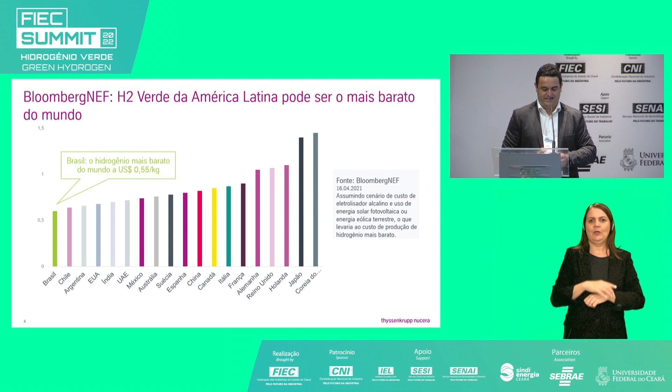It's clearly shown that green energy cannot just be renewable, it has to be new. It's no use to take energy from a plant that has been there for years, withdrawing the energy from the normal grid and leaving it lacking. And here in Ceará especially, we can combine wind and solar energy, which is, once again, a great advantage when we talk about green hydrogen, and an industrial plant ideally needs to be operating as many hours as possible per day in order to provide greater return or yield.

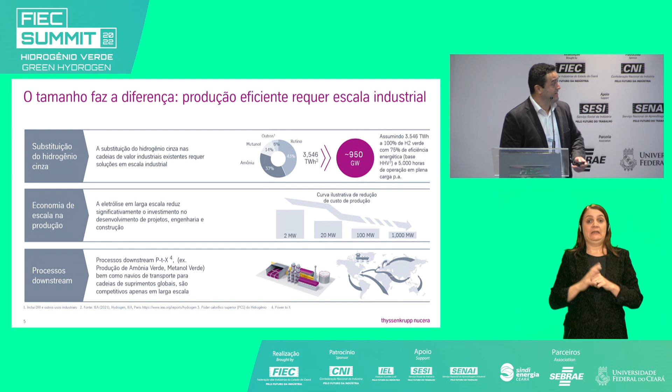What we believe is that the green hydrogen business is a viable business on a large scale. First of all, because the technology chain involved, from the production of solar or wind energy, electrolysis itself, the logistic chain of transport through ammonia and ammonia plants, and ammonia transport using vessels, is viable on large scales. I'm not going to say that there won't be niches. There will. But even based on the Group's history, what we want is to be a leader in large-scale, industrial applications. That's what we believe in.

Now, talking a little bit about our green hydrogen production technology. Green hydrogen is basically the electrolysis of water, using energy to break water molecules to get hydrogen and oxygen. So our greatest inputs are water and energy.

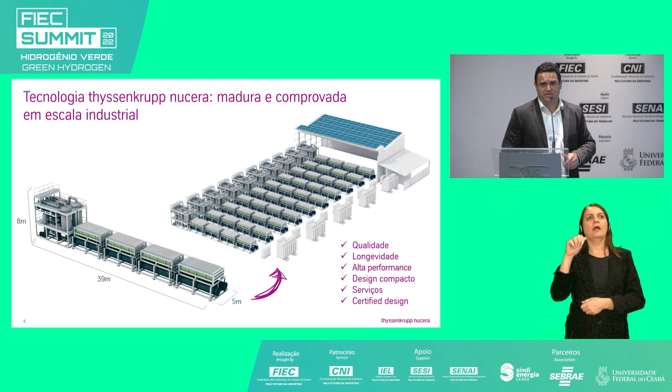In alkaline water electrolysis, basically, you fill the electrolyzer with water and you have an alkaline solution based on diluted potassium salts, helping the electrons to be transmitted within the element. So the electrolysis just happens. We have a capacity of 20 megawatts of electrical energy consumption that will normally produce 4,000 cubic meters of hydrogen per hour, roughly 9 tons of hydrogen per day.

It is a technology that is very mature, because ThyssenKrupp has worked with electrolysis technology since the 1950s. We've been working mainly with chloride alkaline solutions, caustic soda and chlor-alkali, based on electrolysis, and the mechanical design of our water electrolyzer is based on a tested and approved chlor-alkali design, a heritage of the know-how of electrolysis from the 1950s.

It is a non-pressurized, low pressure equipment, so we have equipment with great longevity, typically with electrolyzers we have 30 years, and we need to do a recoating of electrolysis cells to regain energy efficiency. And as Monica said, ThyssenKrupp is in Brazil.

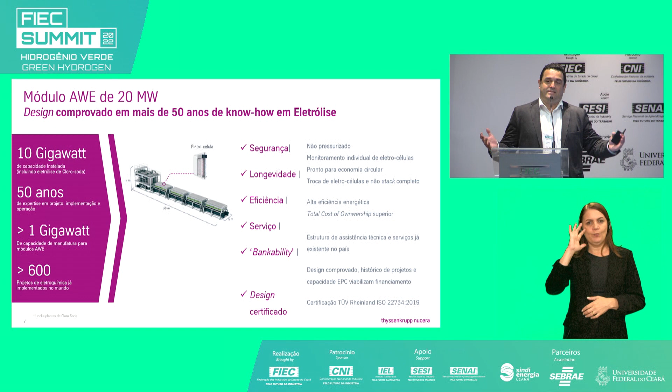We have been working for more than 100 years in Brazil, and we serve the chlor-alkali industry in Brazil: Carbocloro, Unipar Group, Braskem, using our electrolysis for chlor-alkali. We have an infrastructure in Brazil for technical service, and I think this year we'll have our equipment certified with the specific ISO standard for green hydrogen electrolyzers. And we believe that we have the best solution possible for big scales of green hydrogen.

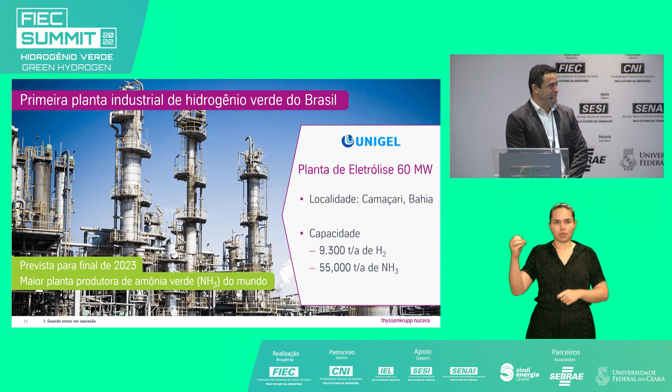And this hydrogen will be able to generate, in terms of ammonia, green ammonia for Unigel, 55,000 tons per year. So thank you very much.

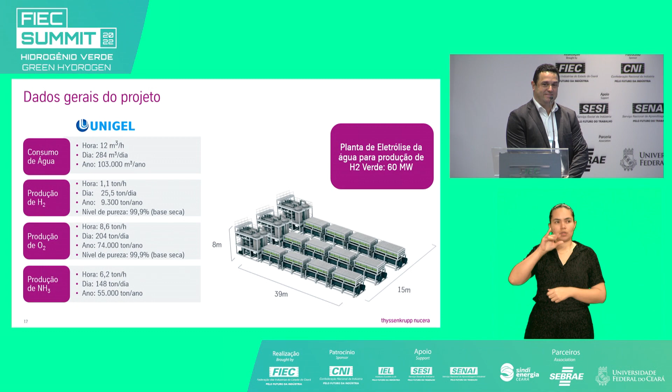For the sake of time, just wrapping up here, we have inside ThyssenKrupp the technologies and competencies for downstream hydrogen applications. So green methanol, ammonia, we've been able to integrate these solutions for the market projects. Thank you very much.

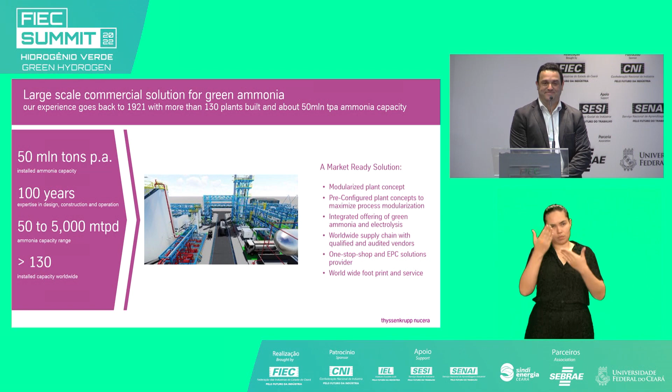Thank you, Luis. Luiz is business developer, business development manager with ThyssenKrupp. This Unigel project is a milestone in our country because it's the first contract of green hydrogen production in an industry, in Camaçari, in the state of Bahia. I consider it to be a milestone.

I would like to apologize with Green Power Hydrogen Group. It's an English company, Mr. Kamak. They will participate in this panel online. But let's talk to Marina Piva, who is participating online as well, with the lecture Fostering the Green Hydrogen Revolution: from Hope to Reality. Marina works with Siemens Energy Green Hydrogen Solutions. Thank you, Marina, for your participation.

Hi, fellows. Morning. My name is Marina. I work as an application engineer with Siemens Energy. We call it the new energy business, for green hydrogen and derivatives. I'm graduated in chemical engineering, and I work with Siemens from 2019. And I'm here to share a little bit with you about our vision on the green hydrogen economy and all the technologies related.

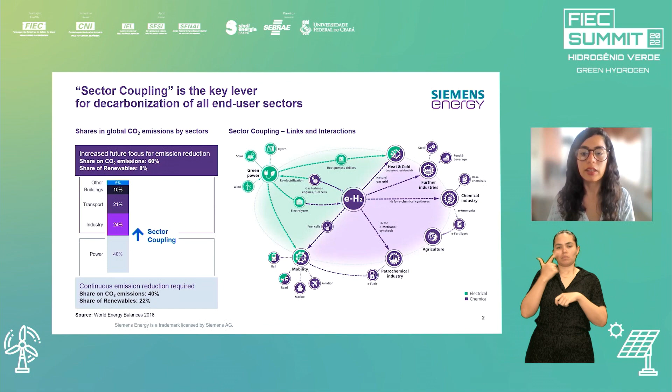And in terms of technology, we see as very important all this chemical synthesis chain from the hydrogen, and Siemens Group is a very traditional group in Brazil. We are in Brazil for more than 100 years, and we have all this history of having a more comprehensive structure of the company that makes us able to go beyond electrolysis. And in terms of our electrolysis technology, we've developed this technology for more than 10 years. We call our equipment Silyzer, so Siemens electrolyzer.

The first version was from 2011 with 0.1 megawatts, and every 4 or 5 years the technology took a leap of 10 times in terms of power, and the efficiency has been improved as well. In 2015, we launched Silyzer 200, and in 2018 the third version, Silyzer 300, increasing 10 times, from 0.1 to 1 megawatt of installed capacity, and now our current version is Silyzer 300, and we are in the tier of 10 megawatts. And the trend for the next years is to continue to take these leaps, and we imagine an order of power of 100 megawatts for 2023, and for 2028 and beyond, we'll start projects in the tier of 1,000 megawatts.

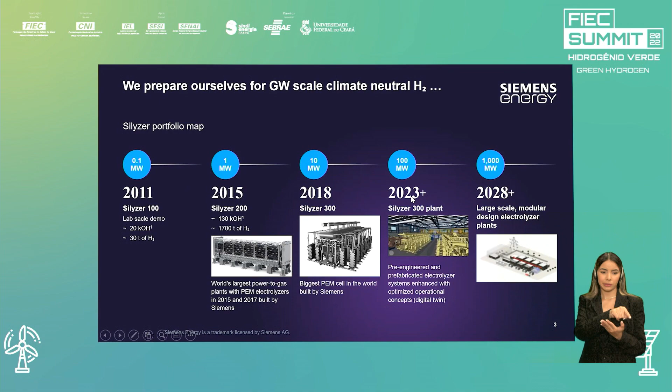And to serve these demands, we are focusing on cutting edge technology, because this is the pathway to achieve hydrogen with the best price possible. So going to these major scales, the hydrogen price will be each day more competitive, and this is how we see the projects becoming each day more feasible. And to address this demand, we keep working with Silyzer 300 technology, but we are preparing ourselves to change our production to a new plant, and we call it Gigafactory. So we'll have Silyzers 300 simultaneously working together in the tier of gigawatts, and that will be as of the middle of next year. So in 2023, in 1 year, we'll have the capacity to deliver 1 gigawatt, and we'll increase 1 gigawatt per year, depending on the market demands.

And the concept is to have prefabricated, precast groups, and the plant concept pre-sketched, to produce the electrolyzers in scale, and also bring more competitiveness for the electrolyzers capex, which has an impact on the project's competitiveness. And currently we have a factory running, we have reference projects with Silyzer 300, and our expertise here in the Brazilian market, with our more than 100 years of experience, complements the manufacturing expertise in Germany, to address in the best way possible the local market solutions that will be very relevant for the hydrogen economy, not only as providers for the global market, but we also believe and see a potential for using locally all the hydrogen byproducts.

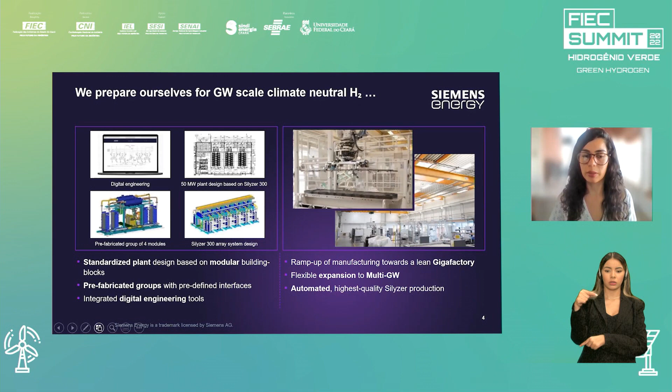Thank you, Marina. I'll call in Mr. Daniel Lopes. He's Director of Hytron Energy and Special Gases for Hydrogen at the NEA Group.

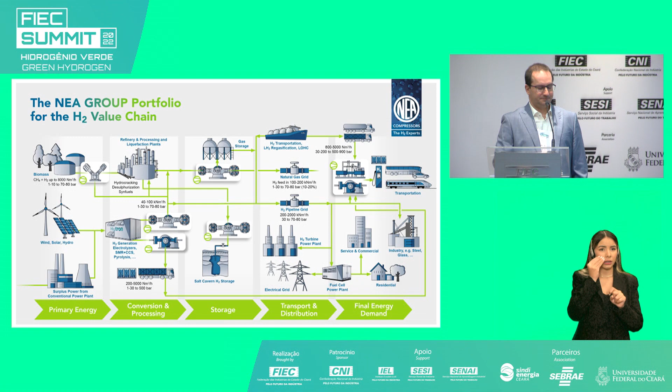I won't get into the details of the Hytron equipment, but I am totally available to do the proper dimensioning for each of the technologies we work with. We work with two technologies: PEM technology and alkaline technology. In both technologies, we work making available pressurized hydrogen, offering in PEM hydrogen at 40 bar of pressure, without the need for compression, and in alkaline, 30 bar.

When we work with biomethane, methanol and ethanol reforming, we work with high purity hydrogen, and we work with the purification of these gases through our machinery. The NEA solution is different from our fellow providers from Germany.

This is a tailor-made solution. We have a minimum size, obviously, of 10 normal cubic meters per hour, modularized in systems of 1,000 normal cubic meters per hour, and we have already made systems, projects and proposals for our clients with more than 100 megawatts.

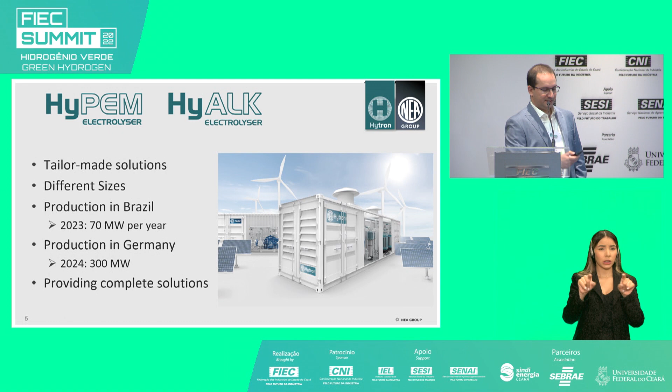Now I'm going to talk about the projects in Brazil. I've separated the main projects we're involved in to show you our reality here in Brazil. First of all, one that is very important: a project with EDP, the first green hydrogen generation project in Brazil at megawatt scale. It's happening now, and it will be installed in the port complex of Pecém. The first hydrogen molecules will be produced this year.

Caio is here, Diego is here from EDP, representing this important project. It's been an honor for us to have been chosen as a reference by such an important group of leaders, not only in Brazil, but in the world.

We'll be here to make the difference with EDP and the state government for this hydrogen to be used in different ways, and to test all the off-takers and how to expand this in the port, within the state. It's a system that will produce 250 normal cubic meters per hour of hydrogen, which is a lot of hydrogen.

So it's a milestone that we need to cherish a lot, because we started everything here through our state. We have an important project with Repsol. It's a Power-to-X project, where we produce renewable hydrogen from water and CO2 to produce e-diesel, for example.

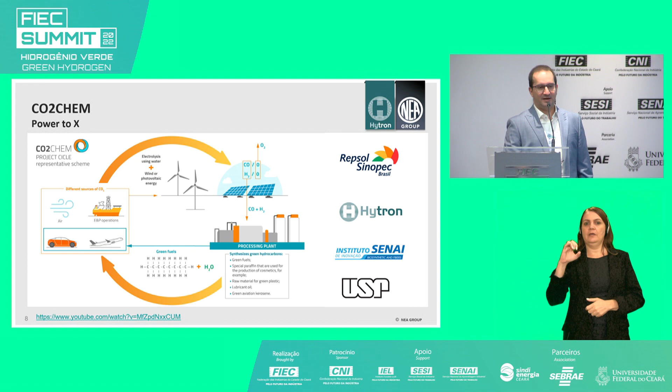In this project, we will produce e-diesel, and the first liters of Brazilian e-diesel will be produced by the end of this year, beginning of the next. And together with the GIZ partnership, we will step up this diesel for SAF utilizations.

That's been a dream of ours: to bring the demonstration of this project from pilot to demonstration scale here in the state of Ceará, for the production of SAF, renewable aviation fuel, using renewable electricity, green hydrogen, and CO2 capture. So we hope these pilots can leverage all the efforts.

So the first HRS, hydrogen refueling station, in the Northeast has been approved with Termopernambuco, a company from the Iberdrola Group, in partnership with Hytron. We're delivering the production of hydrogen, its compression, its storage. It will be connected in the pipeline of Iberdrola, with a dispenser for mobility application.

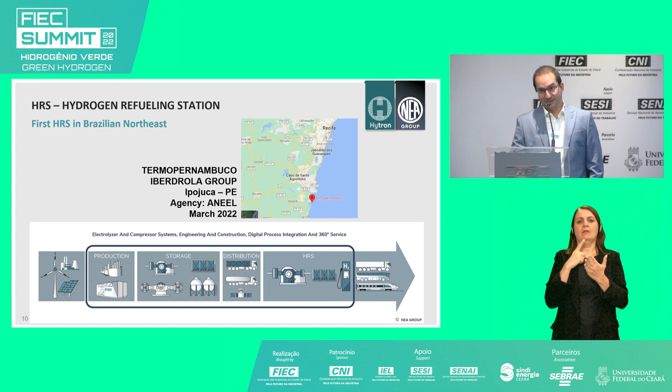So we start with the first vehicle refueling stations in the Northeast, with Brazilian technology. And if that was not enough, we put ethanol in the global hydrogen distribution route. We have other options besides green ammonia, besides green methanol.

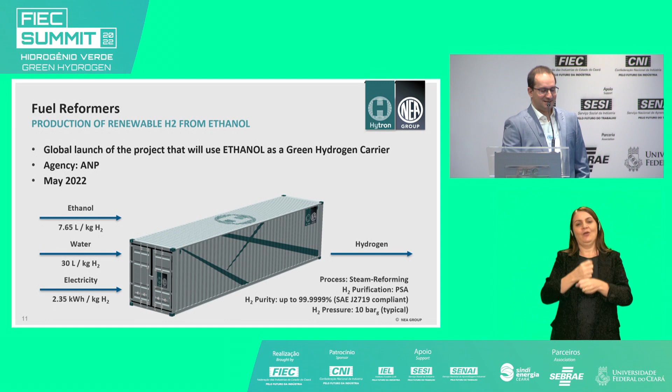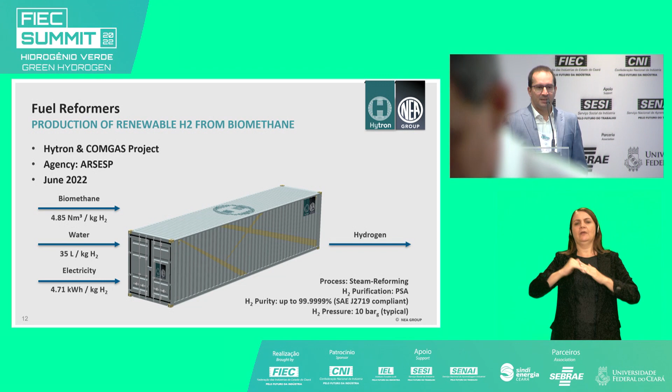All the details associated, though. And we've recently contracted a project with Comgás to demonstrate green hydrogen production from biomethane, to put the biomethane sector, with several diverse and various usages for hydrogen, in the chain of biomethane usage for hydrogen. So we work with the competencies we can identify in Brazil, and with the complementarities of hydrogen. So just wrapping up,

I can announce to you this scalable plant with an output of 100 megawatts, including green ammonia production, focused on the dissemination of this knowledge and capacity building of people that will work in the multi-megawatt plants, in a scale that we get joint knowledge. And then next year, we will be able to announce these projects as a kickoff in 2023.

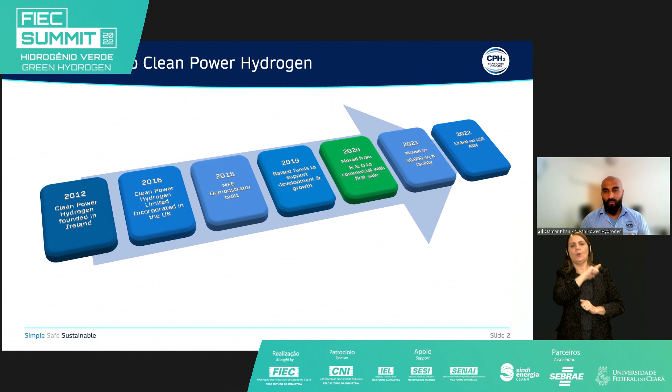So it's something to keep in mind if you're looking at the Brazilian or even the South American economy as a whole, and looking for partners. We would definitely be willing to have a conversation around that. So this is a very high level overview of the business transition. So that was the team when I first started 2 years ago. If you want to know, I'm the person in the odd color shirt there. So we were only 7, 8 of us.

And then during that time, we made a number of sales. So these are some of the customers that I can mention right now. And our first sale was actually to Northern Ireland Water. So the Northern Irish Water Company took our electrolyzer, not for the hydrogen, but for the oxygen. And once again, I'll explain later on why that was the case.

Then we scaled up, which is quite recent, 2022. So this is our new facility, it's a 10,000 square foot facility. We're manufacturing our electrolyzers there, and all the sales that we made are actually currently being manufactured there. And market share, naturally, we're a new technology, so people have not heard of us, they weren't aware of us. Now people are starting to learn a little bit more about us, and our technology is getting out there.

All this is leading to gigawatt scale, and part of that gigawatt scale is that we want to be aiming for 4 gigawatts worth of production by 2030. I know it's very ambitious, but our target is to aim for a 4 gigawatt facility or capability. And that capability doesn't just mean exports, but also different customers in different parts of the world building our technology and contributing towards that 4 gigawatts for us, and also contributing towards the local economy.

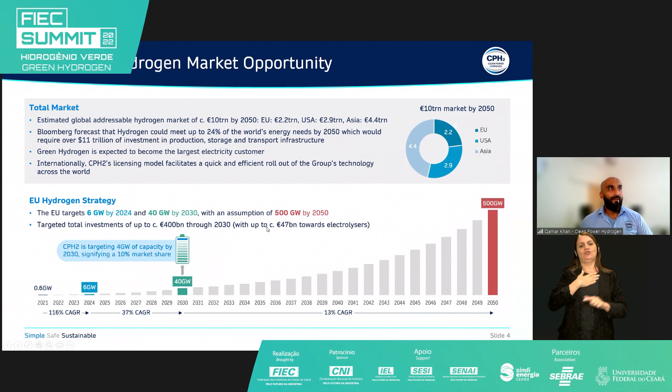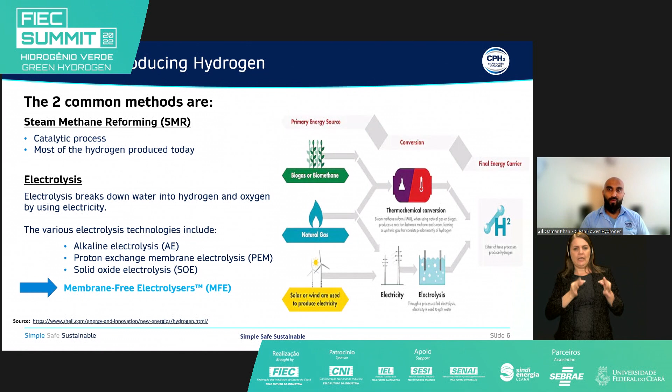Once again, most of you will probably know the methods of producing hydrogen, so I won't dwell on this. But the two common methods of producing hydrogen are SMR, steam methane reforming, and electrolysis. A couple of companies have spoken about the technologies. So where we fit into this mix is that we're an alternative to the existing technologies. We're a membrane-free electrolyzer. So from this point onwards, the presentation will be around our technology.

So if you look on the right-hand side, you see the model of our design. Currently, what we're manufacturing in the UK is a 1 megawatt electrolyzer. A 1 megawatt electrolyzer footprint is a 40-foot container where we have the balance of plant, the control system and the AC to DC rectification all within the 40-foot container, with a cooling system on the top. This is our starting model at the moment.

Our aim is to scale up to 2 megawatt, then to 5 and 10 megawatt blocks, and we want to do that pretty quickly if we want to achieve our 4 gigawatt target that we've set. So where we differ is that we're membrane free, so that means we don't have any platinum group metals or any catalytic application to do the separation of hydrogen and oxygen. We separate our gases cryogenically.

So if you look at the model on the right-hand side, the stack is the circular design there on the far left. At that point, we just generate the hydrogen and oxygen. Then the gas is a mixed gas stream, and it goes all the way to the cryogenic system where the gases are separated. We lower the temperature of oxygen, so we liquefy oxygen, and then we allow hydrogen to escape in gas form, and then we regasify the liquid oxygen to make it a gas output.

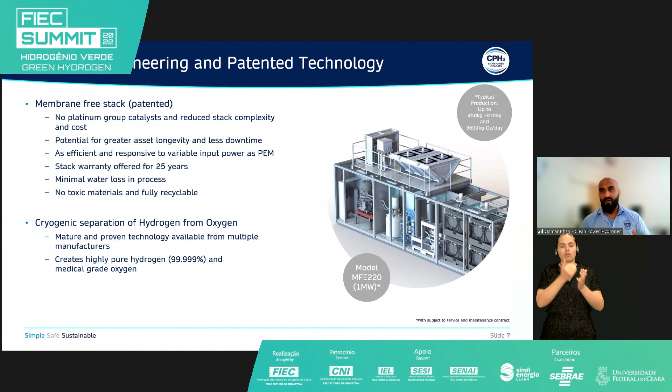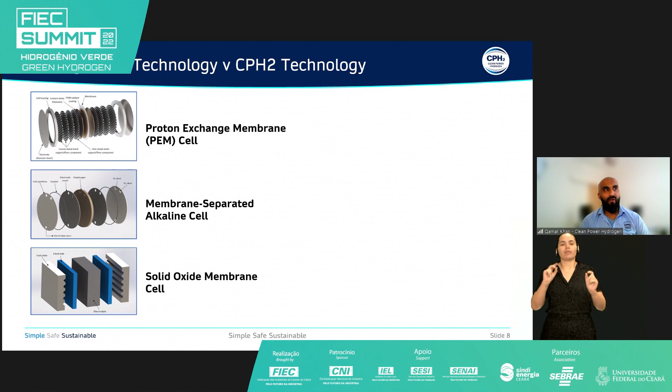So where we differ is that typical existing technologies out there now have lots of components within a cell structure. As I mentioned earlier, the stack is where the hydrogen is produced. The more cells you have, the bigger the stack, the more hydrogen you can produce. And any of these membranes or catalytic processes in these technologies could go faulty or fail. It's a very costly process, very engineering intensive, with long lead items.

So what we tried to do with Clean Power Hydrogen was negate all these components and simplify our cell structure. Our cell structure is literally three components: a front plate, a back plate, and a gasket. And we have patents around the stack, around the cryogenic separation, and also around the whole process.

So as in the bottom left-hand corner, it says simple, safe, sustainable. That's the business case we're presenting: our technology is simple, we're safe, and we're sustainable. We're simple from another point of view as well, in that all the processes in our technology are existing tech. We have cryogenics, which has been around for many years. We have the gas drying process, the stage before the cryogenic separation, which is existing technology.

The difference is we've just got membrane-free electrolysis, and electrolysis has been around for many years. So really, all the stages in our electrolyzer, we're using existing technology and putting it together and doing some black magic to produce the hydrogen and oxygen. So the next slide will give you a video of how our technology works. It kind of summarizes what I've just said, and that will basically conclude the technical side of the presentation.

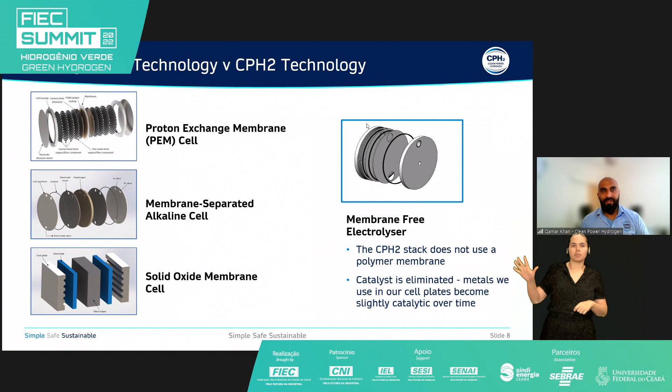Hopefully everyone can see this and hear it.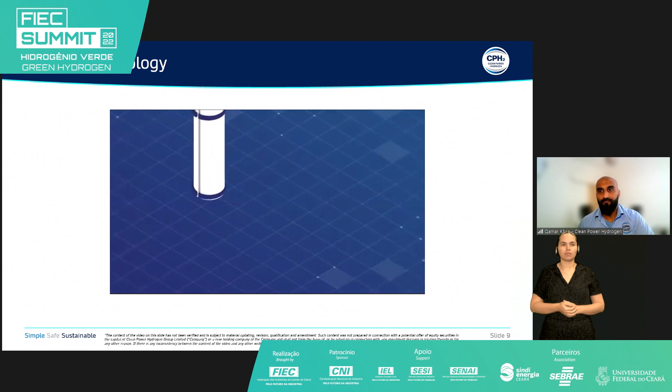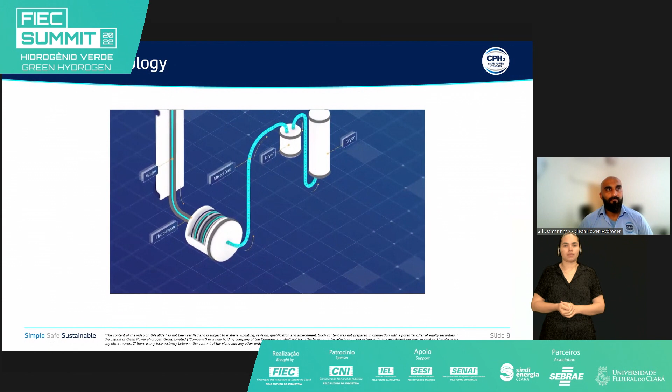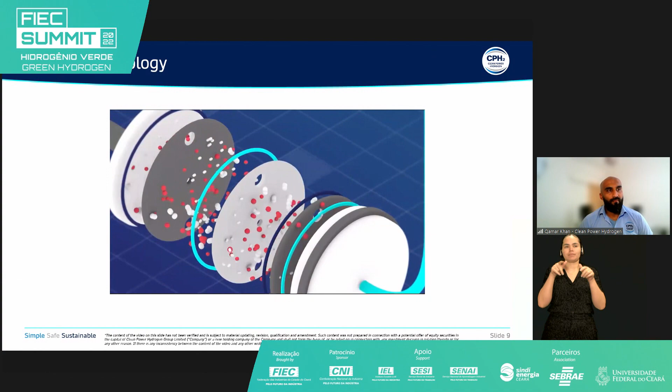Water is fed in, mixed with electrolyte, and travels to the stack where the chemical reaction happens and the gas is generated. The mixed gas continues its journey through the balance of plant to the dryers. Powered by renewable electricity, the stack is fed electrolyte that contains hydroxide ions dissolved in water. Water in the electrolyte is consumed by the electrolyzer and is separated into hydrogen and oxygen gases by electricity.

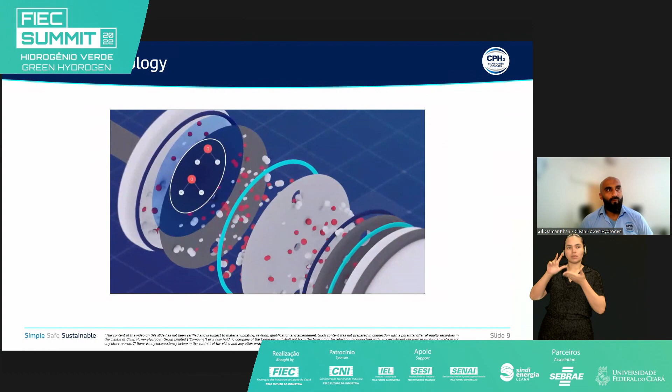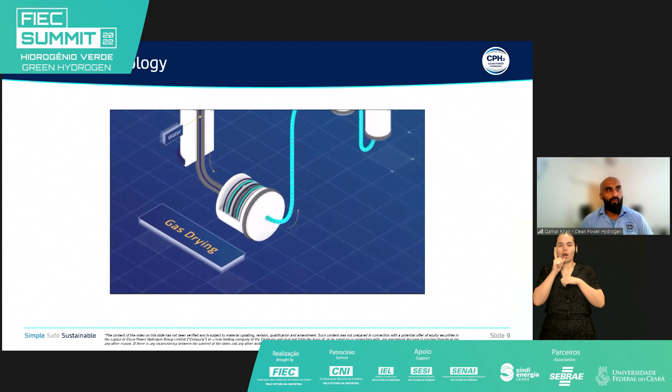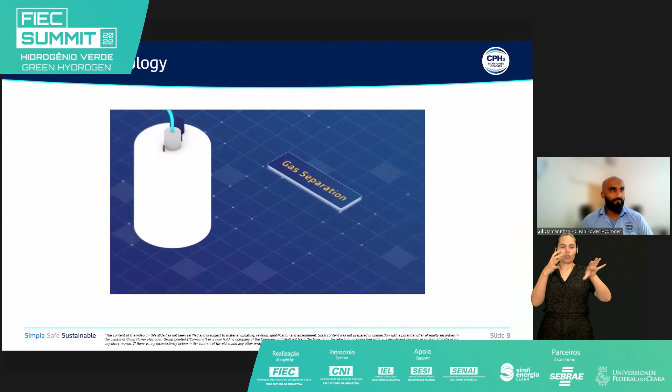Put simply, the water molecules on the left show the hydrogen and oxygen atoms joined together. On the right, you see the molecules after being zapped with electricity. The wet gas enters the dryers. Desiccant removes the water from the mixed gas stream, and gas continues its journey to the cryogen for separation. The cryogenic system is where the oxygen and hydrogen are separated. The separated gases are passed through the purity meters.

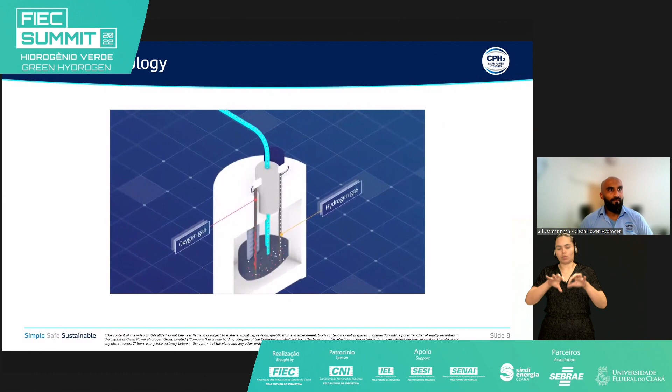The gas purities are measured and passed for use in an application or stored.

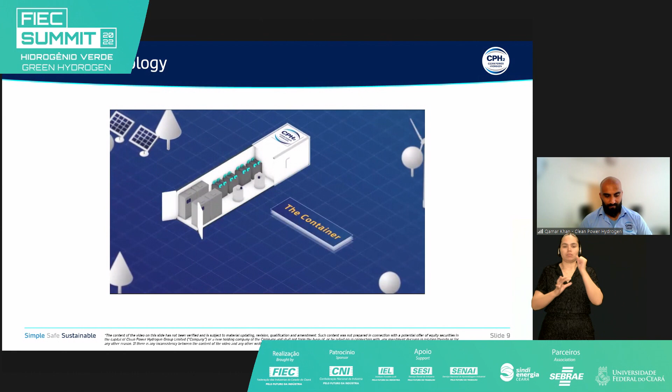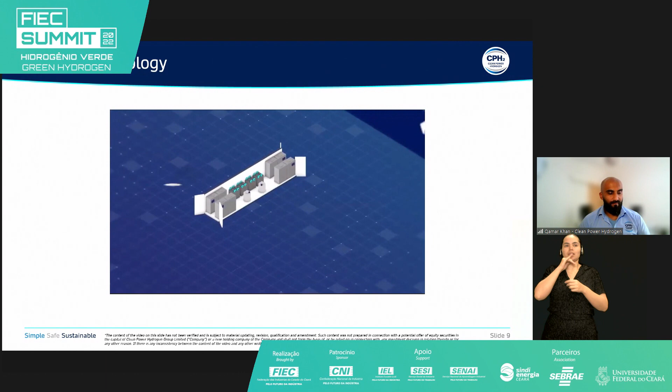For small installations, the whole process takes place in a purpose-built container, using renewable electricity, producing green hydrogen and medical-grade oxygen. Using green hydrogen to power and fuel everyday life will accelerate our progress towards a zero-carbon future. For us, for our children, and future generations. Find out more at cph2.com.